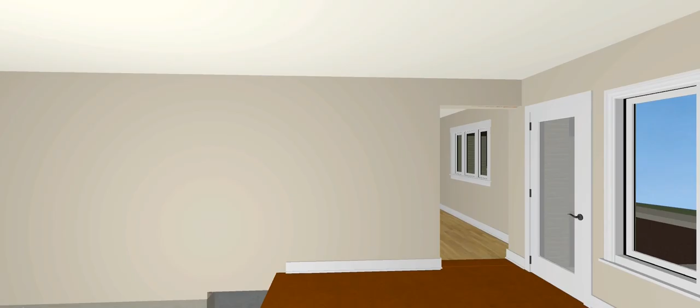Right away, starting with the early 20th century hardware, I knew there were going to be some things to fix up. And this room in particular, coming in, I knew we had to decide if we were going to integrate this space out here, this breezeway space, with what's happening in there.

Additionally, my first question was with regard to that transition right there that you see, and what the different ways are that we're going to use to address that.

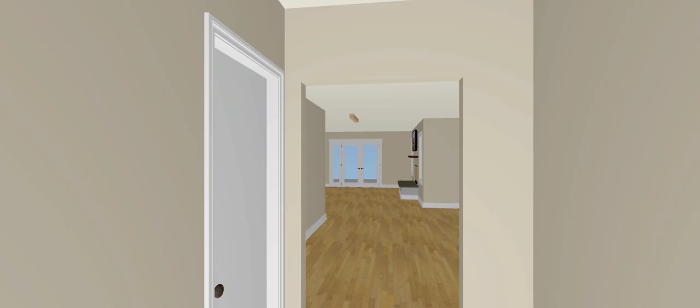And then there was the interior trim and the interior doors and hardware that I knew we were going to have to correct. Additionally, I wasn't sure about this real simple trim that I was showing at the window.

And once I got into the big room and saw a wall sticking down through there, this was the extent of the interior finish at the time, and there was no kitchen. I knew we needed at least some kitchen represented so we could figure out certain decisions of how things were going to work together and feel together.

One thing to keep in mind that I never really address is the left side of that window to the right of the entry door, and how it interfaces with any kind of tile backsplash. So that's just one issue that I didn't end up addressing in this particular film, but something that I think needs to be looked at.

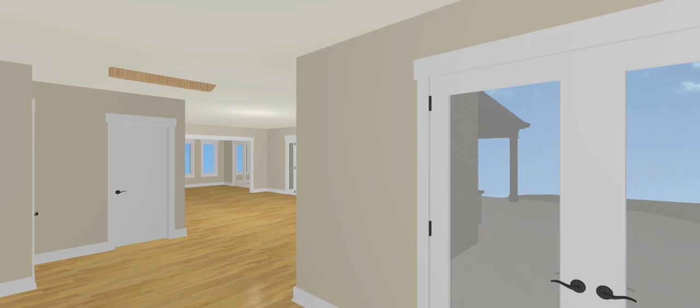And then just coming quickly through here, there were a number of things that I noticed that obviously need to be addressed and done.

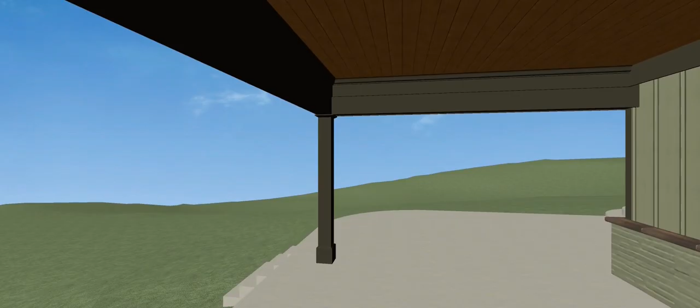In particular, I began to put together some of the interior things that I want to talk about, including in the kitchen. The kitchen I put together all according to Gary's plan, and that all seems to have worked out very well.

And this film will show a few more details. Gary's text came in sometime during the making of this film, as I recall.

One of the things this film will be asking or considering is how much of that interior is treated all at once, in terms of at least the trim and the doors. And does that begin at the entrance to bedroom 4, at the top of the stairs? That will play into some of the questions the film raises, and the first of those is whether or not, or how separate, these rooms will be.

In here, a couple of things happened: I wanted to look up a slightly more elaborate trim for these windows and doors. Before, I was showing the simple 5/4 by 5 lintel, and this apparently is more or less considered farmhouse trim, both the crown mold that's been added at the hall and the way these windows and doors are now being treated. Right now, the breezeway is being kept separate from the rest by that small header that comes across.

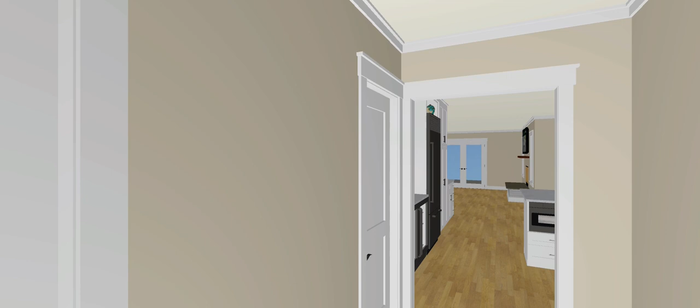In the kitchen, all these materials, including the cabinet style and the countertop, are kept as neutral as possible. And the kitchen is a 96-inch plus kitchen.

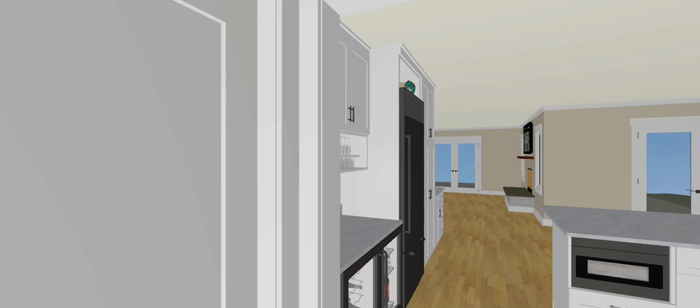So the way I treated that is to add that crown mold, that farmhouse crown mold, growing out of where those kitchen cabinets are. It's about 4 1/4 net from the top of the cabinets, filling in the top of some of those cabinet spaces and continuing as a crown mold around the room, because I think it looks pretty blank without it. I think that was shown in the last clip.

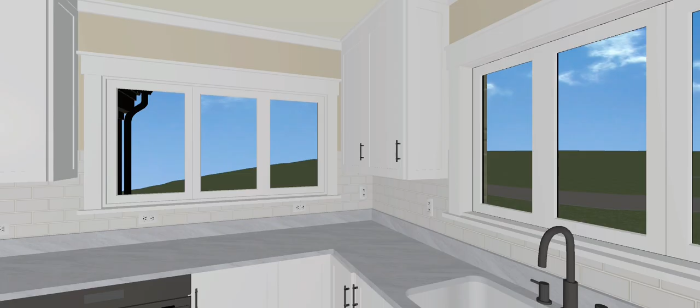And here I'm showing both of these windows low, and I'm showing a traditional backsplash. Now, a lot of times they don't have that 5-inch backsplash on top of the counter, and they just run that tile all the way down. I may have even discussed it in another film. But this shows essentially how the outlets would probably be required to be arranged in this sort of scenario with the windows low like this. There's panels shown at the end of those cabinets in this particular one, or in most of them going forward, with the ends of those cabinets finished as with a real panel.

And then we have this long view with the barn doors in place and open at the moment.

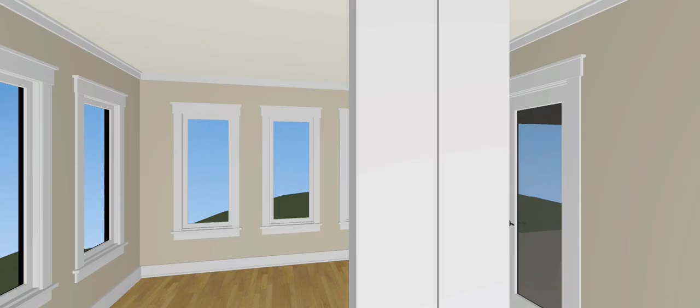With regard to these barn doors, we'll want to decide what exactly the hardware is going to be, because the way I've done it kind of required me to run that lintel further over the end to hold the bracket. But there must be different styles. I didn't spend a lot of time on that, but I did want to at least show it so we would have a feel for its impact.

And out here, I was pretty sure I wanted to look at a few other alternatives at this transition here.

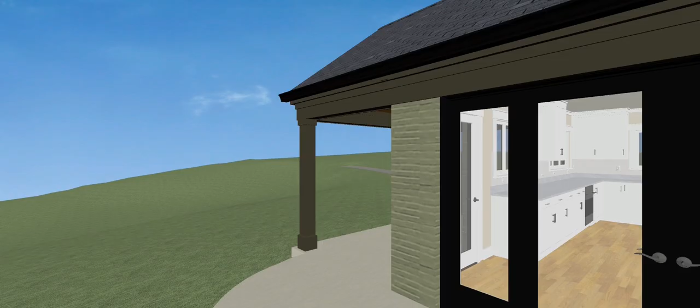Then I added on to the walkthrough, began to look back in this area here. One of the questions is whether that elaborate crown mold is carried through all of this, at least through all of the first floor spaces, excepting perhaps the breezeway, and this is a bothersome transition right there to me as well.

Coming into the kitchen, this is a different treatment of the cabinetry all the way around the kitchen, particularly over the range, but at the other 2 main cabinets on that end as well. And the dishwasher's still missing in this particular film. It's pushed out into the yard somewhere.

And I'm kind of showing you these various clips more or less in the order in which I made them, because of how the different things that I encountered while I made them.

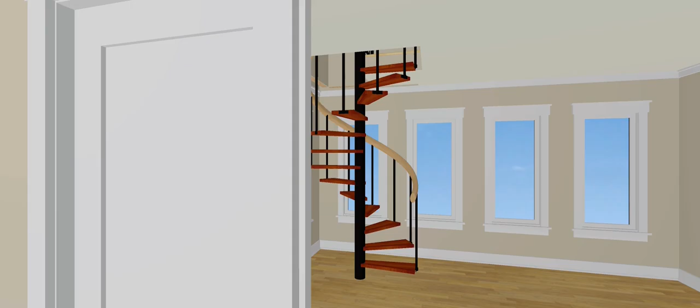For example, part of the clip on this side of the closed barn doors was put together the night of the 1st, the evening after Gary's text. And this part was put together by the next night about that same time. And it was put together—

just rudimentary, with rudimentary research on these spiral stairs. And this one's wrong. It shows like a 180-degree turn. It takes 270 to get up, apparently. But I'd put this together more or less just to see.

I knew that we were going to need 6/8 clearance off any riser to any ceiling surface above us. I thought we'd be able to put this in here and somehow follow the slope of a gable roof over this addition at the back. But I soon found out, at least with it here in the corner, the left corner, we needed more than just the gable roof. We needed also a shed dormer looking out as well.

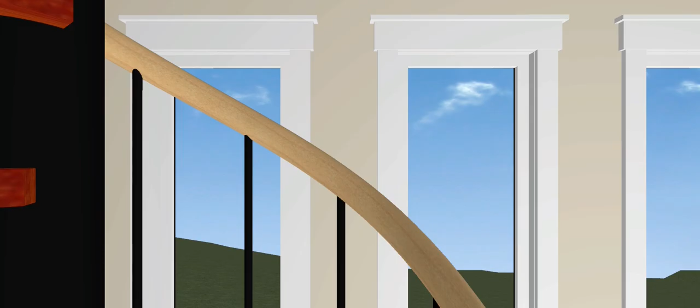And when I promised you some ugly things at the start, this is probably going to be part of it. But we'll just let this section run. This was just the first look, before I researched these spiral stairs a little bit more.

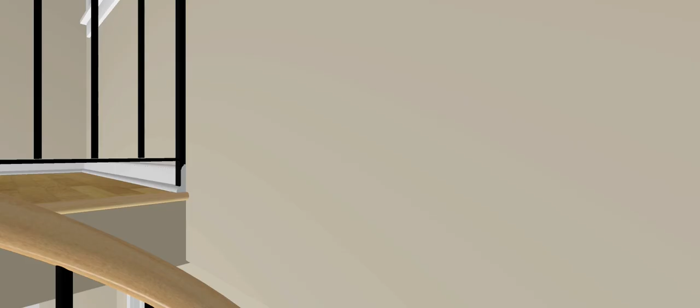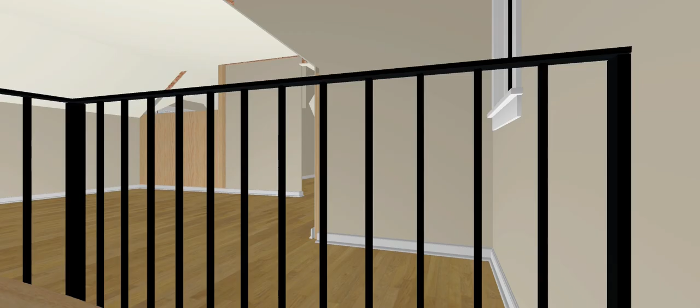Now, that said, all of the spiral stairs that I'll show going forward from here are essentially built on a 56-inch diameter, giving a 24-inch clear between the center and the edge of the rail. That's how I designed it and put it together as far as working with the spiral stairs.

Once I put together the actual model of a true spiral stair, what it would take to get up here, which is a 270 degree turn—

After I'd put that together, because of how clunky and ugly this looked from the outside, from the south, and was just adding so much structure to that piece out there, I began to explore moving that spiral stairs to a different location in the house, or just wanted to see, because there's so much mass back here and so much going on, and it's adding this whole extra room at the back end. And we've got the one at the west, presumably over the covered patio.

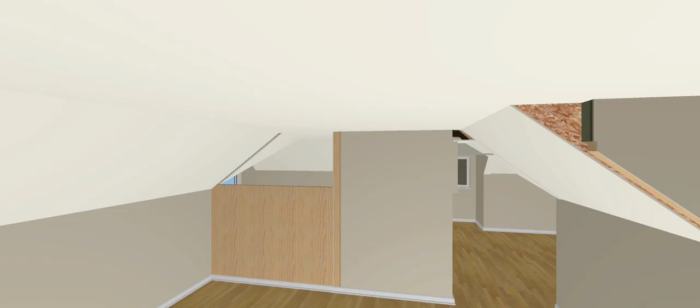So I wasn't sure about adding all of this space. But I knew that if this back piece were added, which I began to call a bonus room going forward, we almost needed to, if it was going to be finished like this and not just storage space, really want stairs up there to serve that room and the other room as well. But I didn't bother putting any of this top stuff together to any great detail because I was already recognizing issues with it.

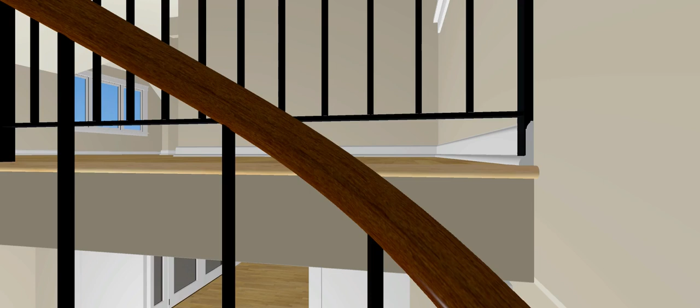But at least according to this film, it looks like I did put together at least enough of this stairwell to see what that ends up there if a person was to do this. And I did not put up a wall between the room proposed over the patio and this rear bonus room. And that's bedroom 4 there to the left, and then coming back around.

And continued apparently to develop this up here, even though that existing dormer just looks at the chimney. It's probably not viable, I don't think. Certainly at this point I didn't think, and I still don't think that is viable to just leave in place. But I finished developing this upstairs in case this were actually desired, and the clunkiness outside were not so objectionable.

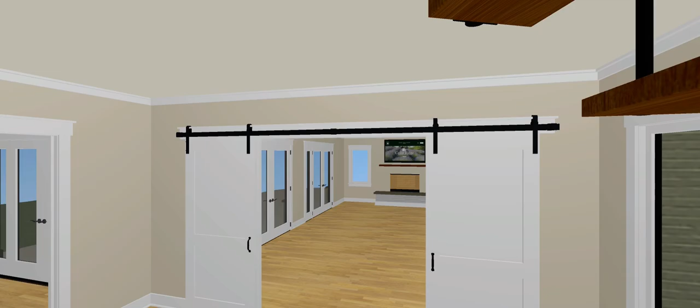And mostly I was just trying to pick up the issues we were going to have, and that stairwell is trying to do some sort of windowing that would work with the windowing downstairs, and with how we're going to have a railing on that edge.

But again, these stairs were not actually fully developed. And if I return to putting the stairs back in this corner, after all this is said and done, it could work out a little differently going up, but I don't think it's going to change the clunkiness. Again, I'm just showing you these slides in the order in which I created them to show you the various issues I ran into, and this was just awfully unsatisfactory and clunky.

There was a much quicker attempt at solving the railing. I didn't really think that was going to be viable for the stairwell. In terms of the roof itself, I thought this was a little more viable than that.

Of course, this abandons any kind of spiral stairs in this corner. Whether they could be worked into this corner, come up in the center, I would assume that they could, but I just didn't think that was going to be very viable. So I went with that for the structure back there, for the roof over that for now, leaving a fairly large bonus room up there at the moment, whether that's attic space or not.

This is how I did this roof right now at that moment. Then I started playing around with these windows, putting some casings on them, and you can just see that this is just hideous. I mean, this is not a vast improvement, but it is an improvement over that, which I would not want to draw. And different windowing here.

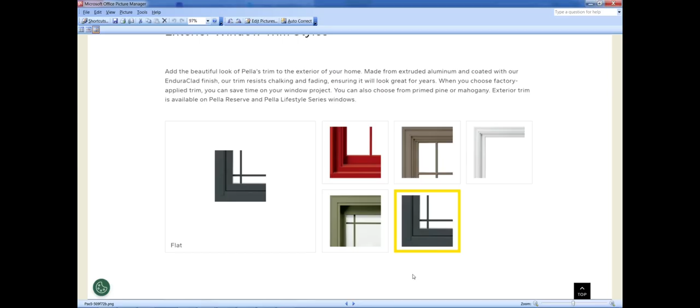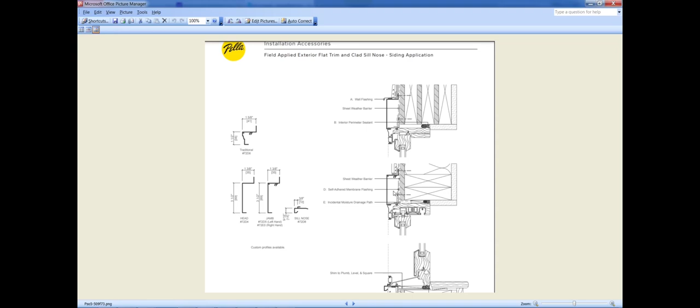And I looked at this Pella built-in trim, particularly the flat stuff. I figured that that's more or less, and you can see it here. If you buy it from Pella, it's all the same color as the windows if you wanted black or any of their other colors. And the sill is treated similarly like that with this extra piece and then 1x4 underneath.

But I just used a sill nosing, regular sill nosing, one of these anyway, under those windows when I began to treat these windows over here.

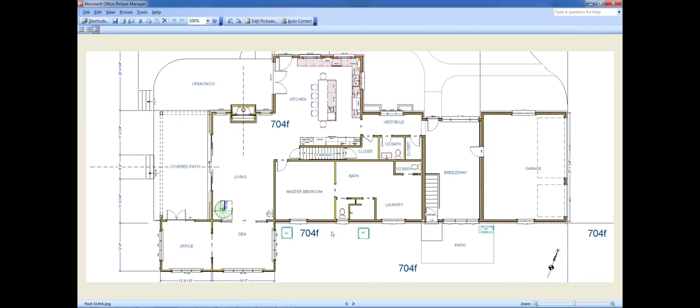At that point, with that window design, when I ran into that bathroom window and I thought that was going to be a problem, I looked at a few other things in this region here and I made some changes that might have to be reverted.

So what I was proposing with these two slides is flipping the laundry room window and the master bedroom, the new replacements, and putting the triple unit in the master bedroom and a double unit in the laundry. Now, you increase that space to the left of this window in the laundry, but it does require this exterior brick fill work on this side of this window and on this side of this one here, as well as whatever framing work would be required to create that change.

But I actually did that and left that alone, and that'll be shown in some of the ongoing slides, and it'll show an elevation of it. But also the bathroom window, I went down, and it's not shown in elevation, but it's shown in some of the exterior shots.

This bathroom window, neither of those that I first showed were going to be viable. So this goes down to a 25-inch wide unit so that you have some room on either side of that casing. And then this becomes 3'3" wide alcove for the toilet.

Because the 211 is just side to side, it's just too tight. So I proposed using a 25-inch wide and just using expander on the outside on each side. And so that's what I ended up doing with those 3 windows, and I left that alone for the rest of this film. That's how it exists right now.

Also in this slide, and you may disagree with anything seen so far, but also in this slide, this doorway is taken down to a 3'0" wide to allow for casing to put on it, because I think you saw in the one early walkthrough, that's a little funky right there. So I took that down to a 36-inch wide opening, still centered on this master bedroom this way, but providing some margin here for the casings.

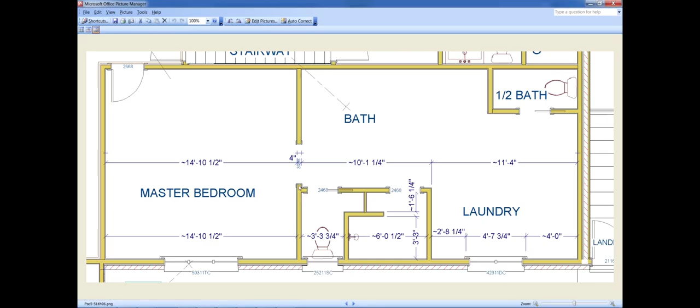And returning to the floor planning then, this was with that exterior spiral stairs, and we would have to create some sort of room for that to come up that's closed off.

So I started looking at different alternatives with regard to that stairwell, and whether it could be gotten into this corner of the room here, and how much room we would need upstairs to access it from a common area.

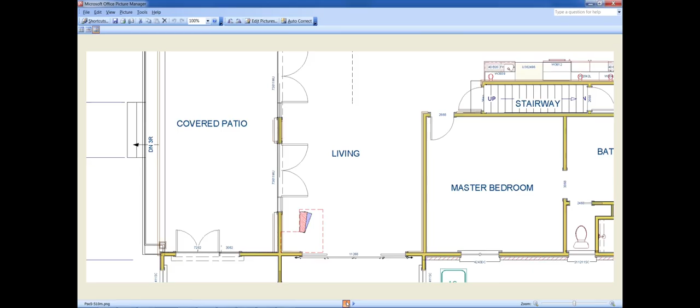Even though I wasn't sure that this was even viable from a planning perspective on that first floor area, I did continue to relentlessly pursue it to see where it would lead. For the opening in the floor, I think it may be best for the head of the stairs to end up like that at the top, but that made the beginning something like this, where you're facing the wall.

Then I wanted to look at it coming up that way, like this, and this is what I settled on.

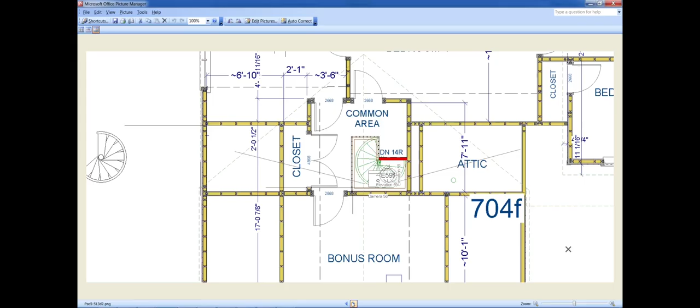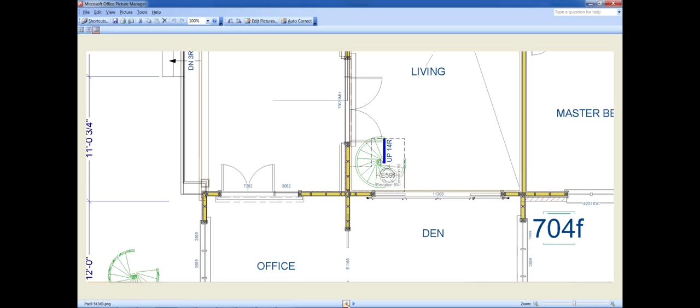So maybe the 270 works, I don't know, but you start there and you end up here. So the 270 is actual—as near as I could tell, the 270 is actual fact. So 270 degrees, because you start down here and you end up like this at the top, and it's like this down here.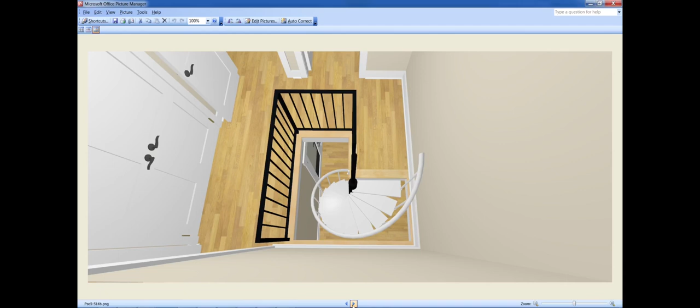And then I had all this bric-a-brac going on up through this opening. There's really just a couple ways to treat that. I just had so much going on through there, and like this at the top, and that was really taking up space as well. So I got away from all of that.

The next thing, before I got away from all that, was this wasn't going to work with these door systems set up this way. And that required an additional change on that facade, a pretty substantial change, where I just took both of those doors out and put in a 13'9" 4-panel sliding unit that parts in the middle.

I know this is a substantial departure from what you had drawn, so it may not work. This can actually be longer than that, although this is a bearing wall here, so if it got to the 15'9", I think the next size up is a couple feet wider. It would come over here and still work fine.

This would take up this whole room in glass, or this whole wall almost in glass, but this might have to be thickened to a 2x6 wall to accommodate a beam sizable enough to carry that across.

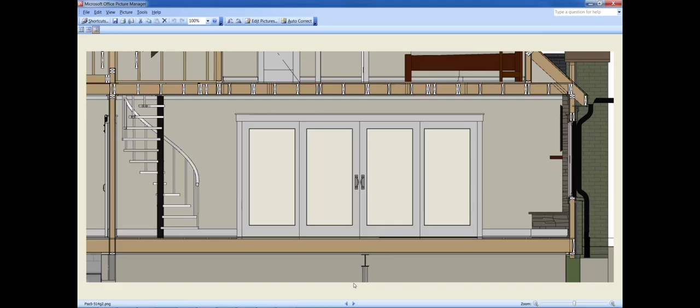I wanted to simplify all that bric-a-brac going up through the ceiling. So the choice was either take it all the way away and let the crown mold continue to carry around like that, or break the crown mold—and I actually elected to just break the crown mold and have the wall continue up to the floor.

This kind of left me with this upstairs. By this point I had developed a couple shed dormers out here that are also pretty hideous, but they increased the floor space of this bedroom as well, and they did add these 2 egress windows in this bedroom, flanking the chimney, under a shed dormer here. You'll see that in a minute or two, but it's pretty ugly.

But nevertheless, I made some other developments in that bedroom. Going forward, I added a closet over on the other wall, mainly because that bedroom became so large with this unviable addition.

I continue to run these walkthroughs to solve various issues. These two little clips show where I've relocated the toilet in the bathroom and brought that chimney out into the room.

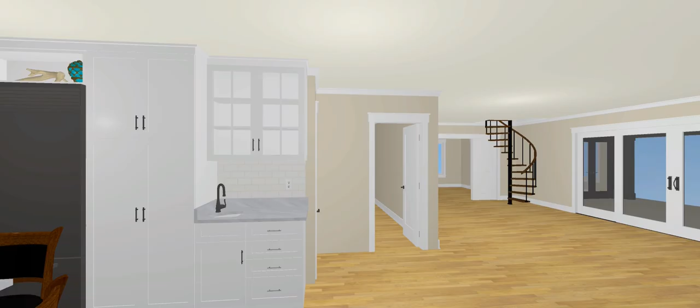This next one unites this whole space, taking out that thing, and puts the crown around the breezeway. It doesn't change the breezeway floor, but it does that much anyway.

It probably gives you a little bit more of a better look at this kitchen. I think I modified it a little bit. We did a little start to get a better feel for that space, adds the chairs in, and so forth, and how this was going to feel like this.

Still has all the bric-a-brac in that opening up there, so it's fairly early film. That was the windowing arrangement in those rooms at that point.

This next run here is the first run all the way through the plan as it then existed at that point. We keep looking into the bathroom, but that's beside the point. I pulled that chimney back where it doesn't project as far into the room, only 4 inches.

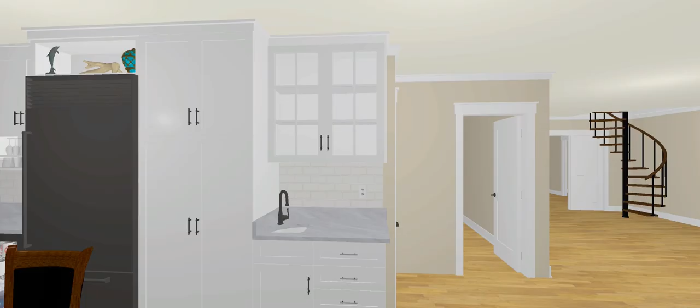Still the bric-a-brac up there. So I think this one's... and I've made some changes on this one at this front step.

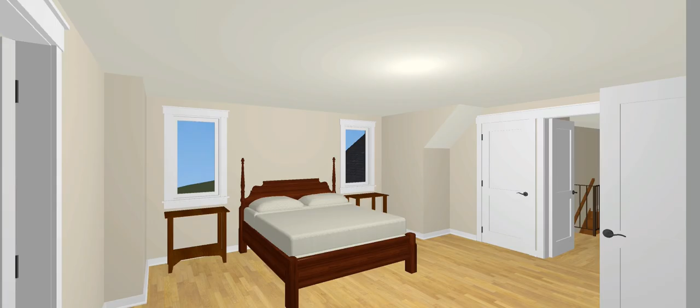Here you see these changes in the bedroom and laundry with moving those windows and the different window changes in those rooms. Coming out backwards and leaving.

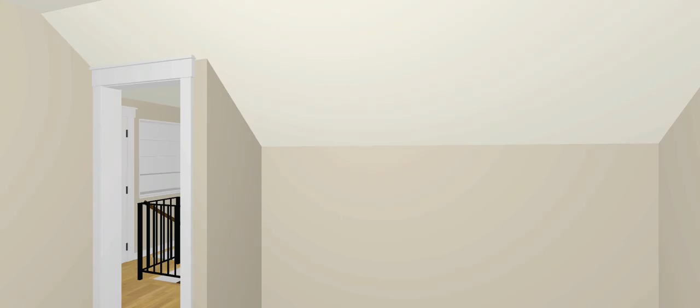Then upstairs, that's the bonus room at the back. Closet on the left and stairwell coming up, and this was this unviable shed addition. Sadly, that was just not going to work.

That's a big queen bed shown there, and this is, nothing great in here either. But that was that first run through with various things that were happening. There's a closet at the top of the stairs, now 2 closets actually at the top of the stairs.

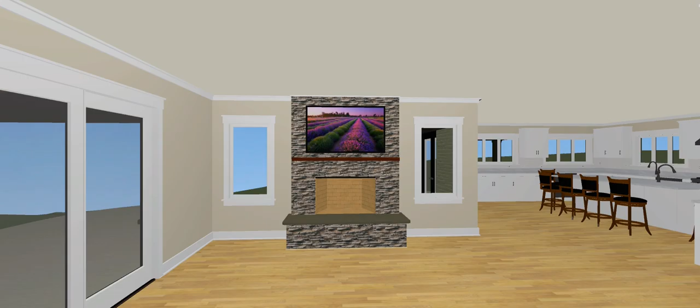You might also notice that the fireplace has been enlarged. Bringing that in gave you greater depth, so we assume a little greater height as well on that fireplace box, which is what's shown here at this tail end of this clip.

This was just this first trip up the stairs with that molding broken as shown. As I was trying to develop something that would work out here on the front end of this, this is how these floor plans were changing.

This was that first one with this, to me, quite unviable shed dormer. That was when I brought the shed out and engaged it with the chimney, brought the whole shed dormer out, and engaged it with the chimney.

Trying to get a little bit lower, but you just need so much room for these egress windows that it was difficult to do that. It was impossible to do it, actually.

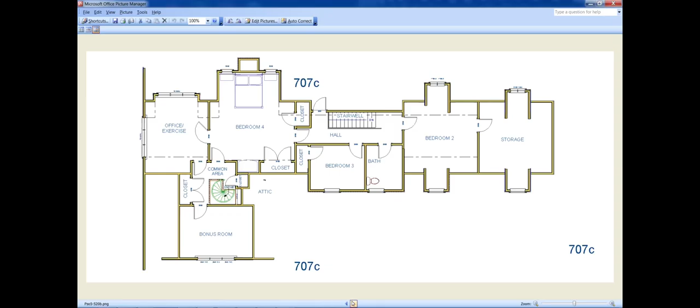But this one actually separated them into 2 separate shed dormers. You'll see that outside when we get out there. This separated them into 2 shed dormers, and yet it was this huge bedroom 4 once we pushed out even further like that.

This was really clunky out here regardless. So I didn't feel like I was going to get something viable to work out here with a dormer around that. I tried some other things as well out there.

So these skylights, some of these skylights, the right ones, are qualified for egress. Some don't, but some qualify.

So there's this type that opens from the top, which is the one I ended up showing, and this one that opens from the side.

When that's put together, then you have something like this, where these are the two skylights. And if you use that to solve the egress requirements, you almost have to put two just for it to look right inside and out, even though this one doesn't really need the special hardware.

This could be fixed. One or the other could be fixed. But I'm showing two. The ceiling slopes all the way down to these little short knee walls at this end, and then this is a taller 5-foot wall out here.

These next films will show the impact, how these spaces feel. So what's shown here is these two egress windows on the roof slope, making this bedroom code compliant, and an actual regular gabled dormer out the office exercise room.

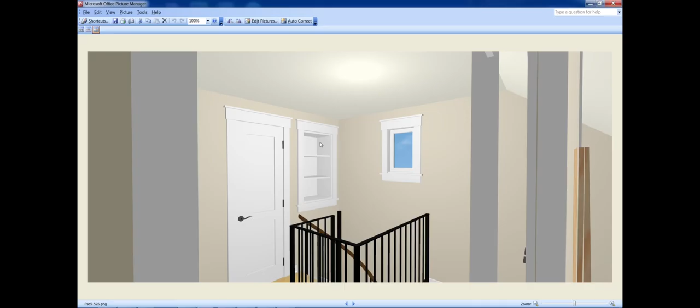Getting closer to the end, this was actually how I ended up treating this wall on the left, with a smaller cabinet separated from that there, regardless of what happens on this back wall here.

This was looking at these office and den windows, and again, I was probably confused about this end. But this just looked at a couple different alternatives with big picture windows, 4 big picture windows, and then operating flanking windows, so these ones become wider flanking windows than these ones. These are 29s and these are 35s. But at the end, I believe I really liked the one with all the separate windows best.

And this was another thing that I did, where these were all operating or fixed, however you wanted it, with these sizes and grouped like this, where all of these become the same size windows. 29, 59s on this back wall, but it's 2 groups of 4 instead of a group of 3 and a group of 4. But that was just different experimentation I was working with back here.

Here's one at the top, 3 across the top. Those are a couple different things that would work up there in that hallway if that rear bonus room were completely abandoned.

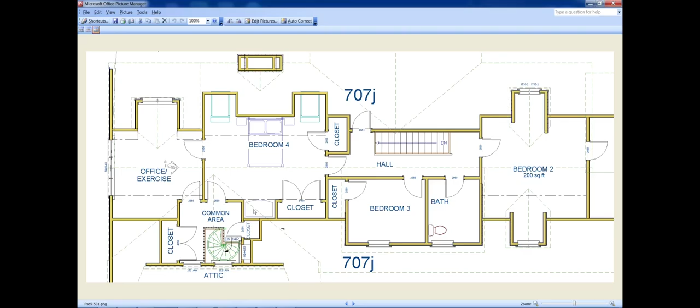And then downstairs, by the time we reached plan 707J, I had separated these into these separate windows, with a large picture window, it's actually 59 by 59 at this end, but you'll have to clarify what is going to happen there. But I went back to this individual, and the spacing, they're all the same size, 29-59, but these ones are spaced a little closer than these ones, so we can get this more balanced outside, or at least that was my feeling.

And finally, a review of this exterior, such that it is. But this was this shed dormer set back from the chimney. And I tried to make it a little bit less, and this was engaging it with the chimney and separating it out from the other dormer, making two separate shed dormers. But at the end of the day, it was just too clunky.

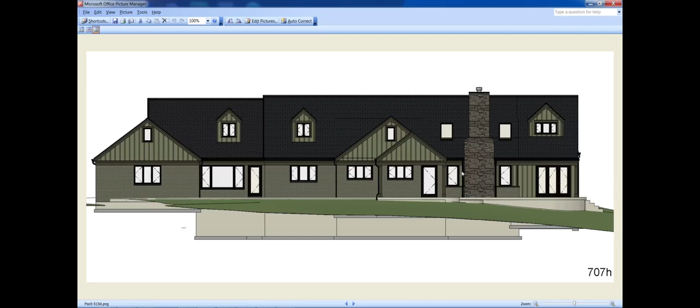And then we have the two egress skylights. And the last move I made over there, and we'll see that on the rest, but I made these windows a little bit shorter and brought this brick wall up a little bit more.

Like that. But here is the review of this exterior as I developed these various, struggling to find something that would work.

First, there was that whole unified dormer where this still sat back from the chimney. And then there was the attempt to engage that with the chimney, making that room giant and really increasing its mass out here and making it worse than what it was before.

Even bringing it down some. Everything's still code compliant here, but it's still clunky from outside when you rotate around. And this one's the same thing, there's just too much right there, at least that was my feeling.

So we go down to the skylights and a separate dormer here. If you wanted, this adds a lot of space up here in this room, maybe 70 feet or so. And the windows that face north, which is an art studio type thing there with north facing windows. But you can get that view and light from skylights as easy.

Look at some dormers on that end. I think adding stone to the chimney outside helps everything a lot, really. But that's I don't know, one way or the other. I liked adding the stone to the outside of the chimney.

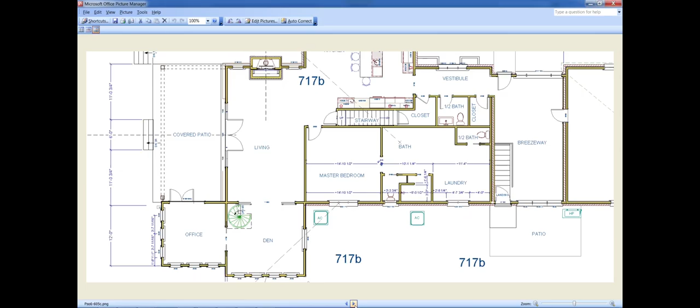You could just have 4 panels with one 6-foot door, but I reverted to the original plan with these 3 panels, essentially two. I believe these are all 5.5 feet, and these flanking units are 30 inches, so they look about evenly sized.

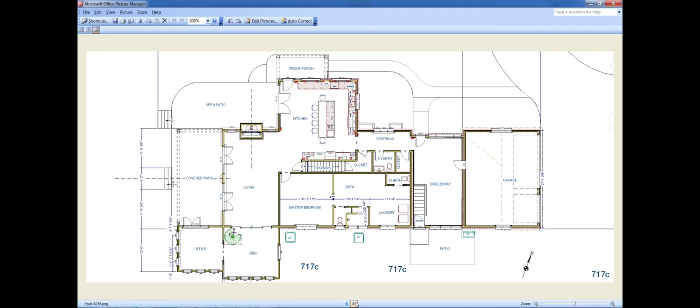This is just with the den doors closed. And so that would be the whole plan on the first floor at this point, 717C, with these further modifications.

And this is what you end up with on the second floor, moving this from basically here back to here. And this is how it's shaped up from the outside.

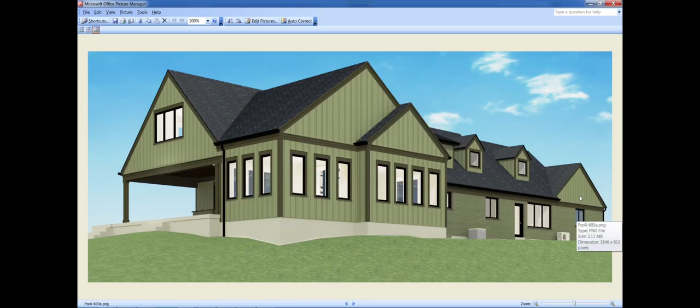So you can see a little bit more would help this. I mean, I could have bigger overhangs on the roof, that would also help it. But I maintained that horizontal band just like at the garage at these 2 facades here.

And this was still with the big 4-panel sliding, single sliding door like that. And this is reverting to the 2 sets of doors.

I didn't want to leave that last film alone at 52 minutes because so much of it had relied on moving into that living room, and I'm not sure what you had planned in terms of furniture and so forth in there. So I was glad I was able to return to the original idea and concept of, if we were going to put in a stairs, putting it back in that den once I got things further figured out.

And there was no need to make any changes from that northeast angle.

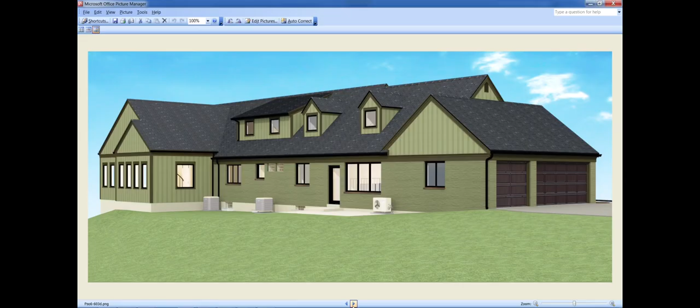But here then is the final walkthrough of the whole building with all the final updates through this date with this particular plan, 717C.

First, although I'm not sure what your plan was, I did just unite these spaces by making the same floor covering everywhere. Then I used whatever measurement it would take to make these window and door heads align.

And by the way, all of these window and door heads shown throughout here are actually composed of about a 4.5 inch piece with a 3/4 inch piece on top, so the whole thing is only 5.5 or so tall.

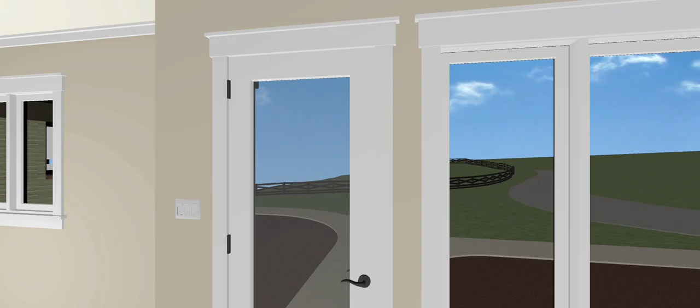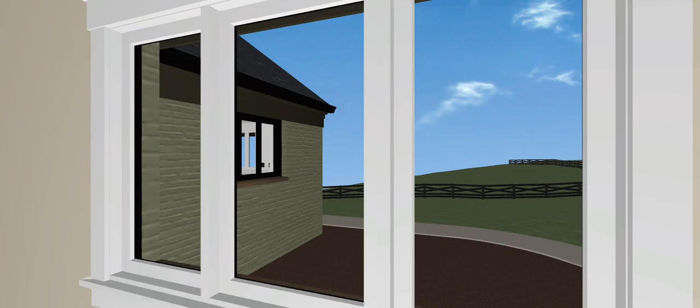And secondly, out here for this particular film, I put a flat garden bed out there, just an inch or two below the level of the sidewalk, but completely flat. The only issue with that is that it's all the way up above the floor framing, so if something like this is done, some serious consideration is going to have to be given to waterproofing that whole wall where it has that exposure, where the grade is up that high. So I did want to mention that.